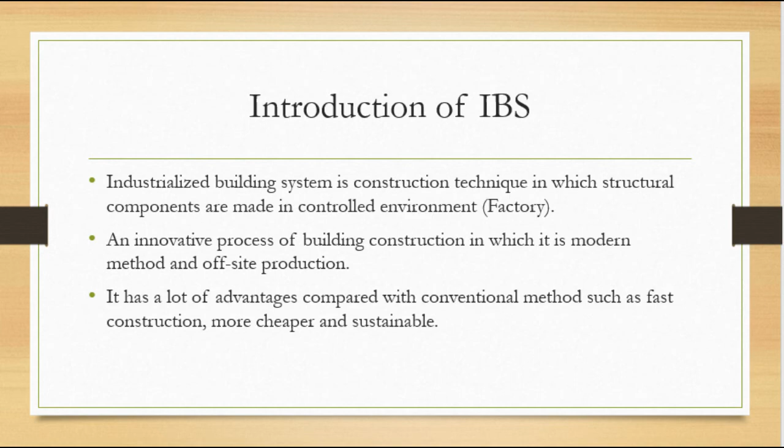Because it doesn't use a lot of timber, so we don't have to cut down trees. Also, it doesn't produce much wastage, unlike the conventional method which produces a lot of wastage.

So this is the background of the project. The name of the project is Heathrow Hotel, made from a light steel framing system. This project is located near Heathrow Airport, London. The client is Shelby Limited and the contractor is Watkin Group, and it costs around 1.9 million pounds.

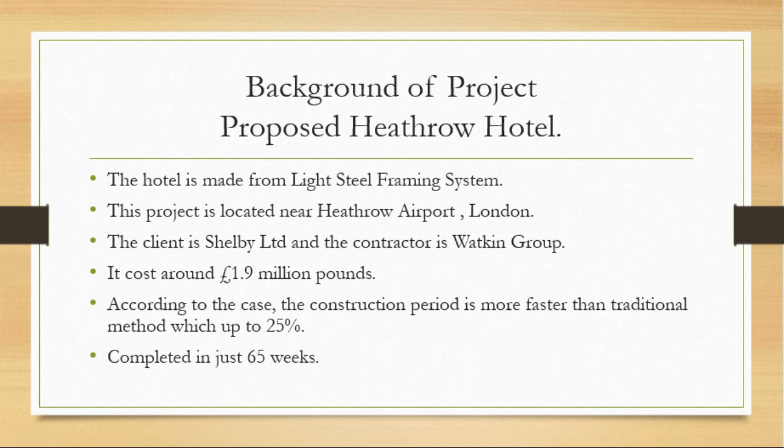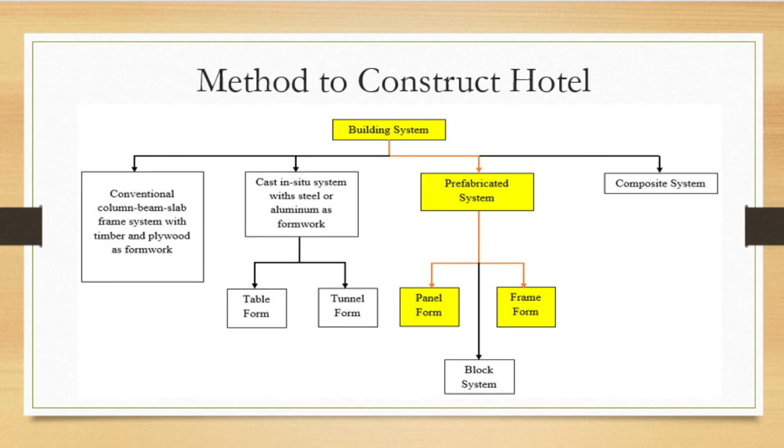There are 4 types of building systems. The system used in this project is the prefabricated system, using panel form and frame form. Here are the details of the project.

They use mixed modular and light steel framing. The Metframe package includes designing, fabricating, supplying, and installing all structural members, costing only 1.9 million pounds. Internal walls are load-bearing steel studs with insulation and dry lining to meet fire resistance and acoustic performance standards. A special feature is an additional layer of insulation to provide extra acoustic buffering against noise from the airport.

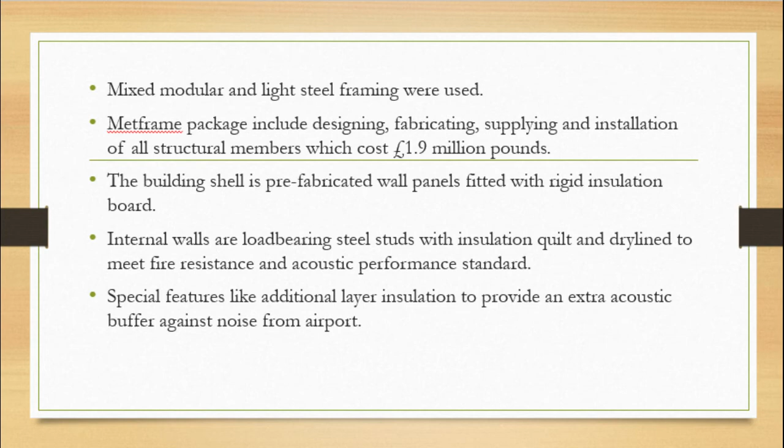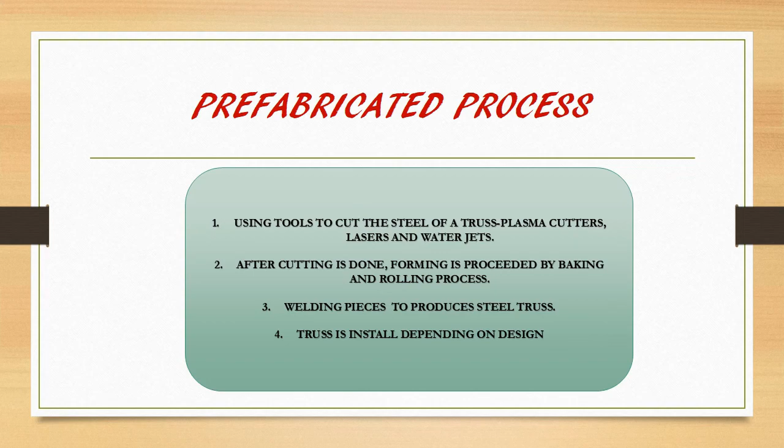This slide shows the manufacturing process of the system: the prefabrication of steel trusses, how the welding process is done by the fabricator, and how the trusses are installed on site.

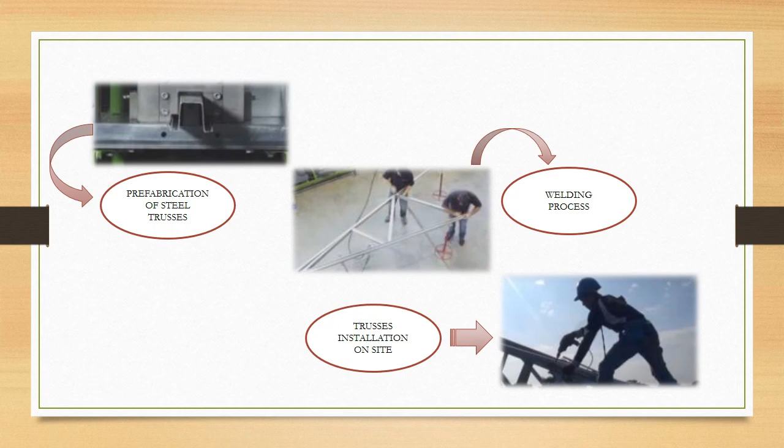There are 3 types of framing systems. First is skeleton steel framing. Second is wall-bearing steel frame, and third is long span framing.

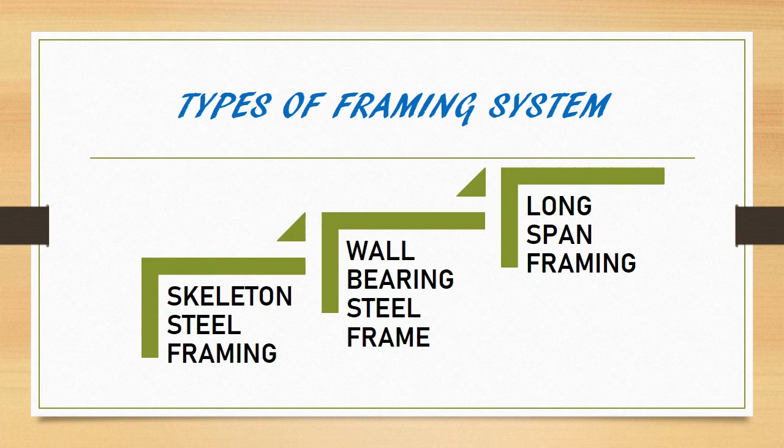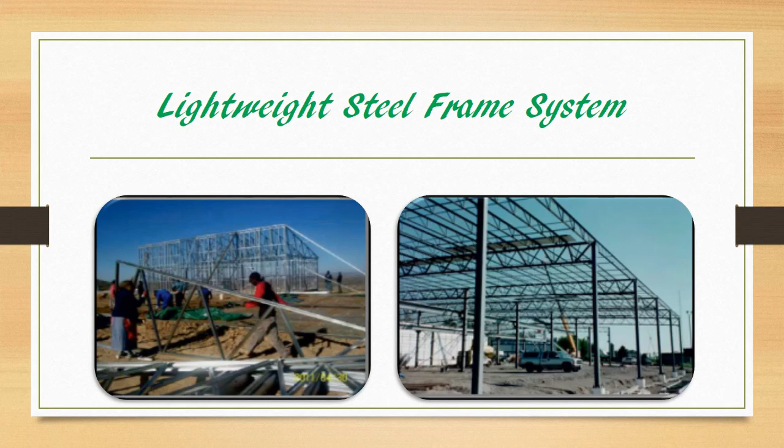The parties involved in this system are the contractor, client, and buyer.

The contractors are the stakeholders dealing with the project management, handling issues relating to construction on a day-to-day basis, including the means and methods used in the execution of the construction of the project, in accordance with the contract documents.

Not only that, they are responsible for supplying material, labor, equipment, engineering vehicles, tools, and services necessary for the construction of the project. In many cases, the main contractors will delegate portions of the contract work to subcontractors.

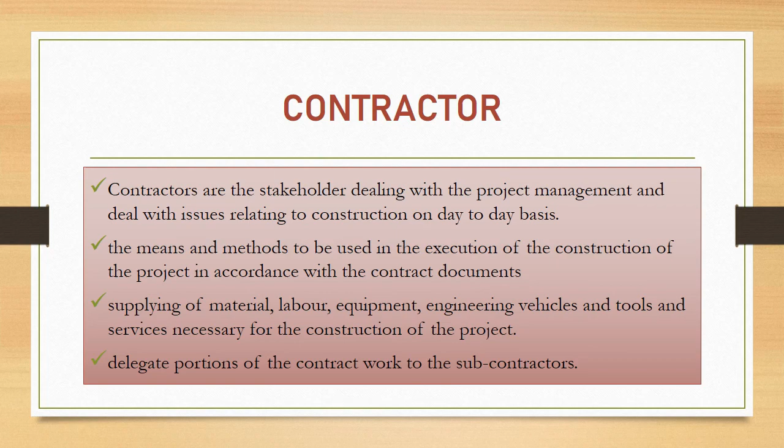Next is the client. A client with good knowledge and awareness of IBS benefits will undoubtedly encourage designers to design a building according to IBS. The adoption of IBS in Malaysia is client-driven. Thus, the client plays a major role in decision-making whether to use IBS or not. In line with that, comprehensive awareness of best practices for the client and decision makers should be held for them to get the correct information on IBS.

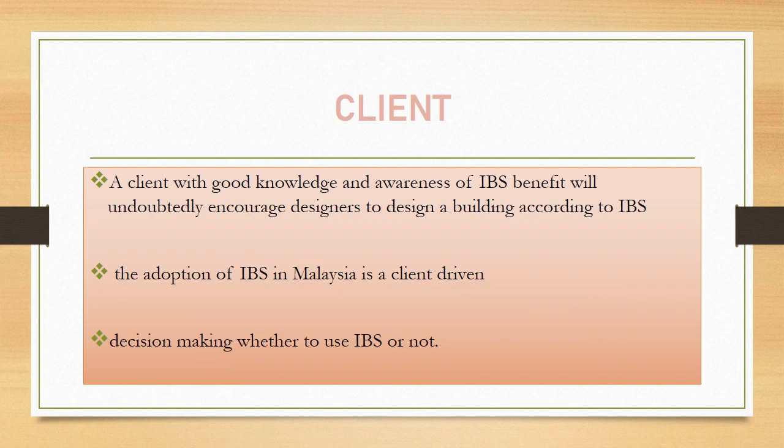Third is the buyers. The buyer is often skeptical with IBS buildings due to durability and quality issues such as leakage and concrete problems, unattractive past designs, and inflexibility of renovation. Thus, to improve the perception of low quality, it is recommended to improve training in installation techniques by addressing interfacing and tolerance issues and avoiding any faults during the installation process.

At the same time, manufacturers must ensure that the components of IBS design pass quality control measures before sending to the site. Regarding inflexibility of renovation, the buyer should be explained about the availability of a hybrid system that caters for them who often renovate but at the same time keep the structure intact. Therefore, this system offers less wastage and provides speed to the contractor at no extra cost, extra headroom, a consistent finish, and flexibility for renovation.

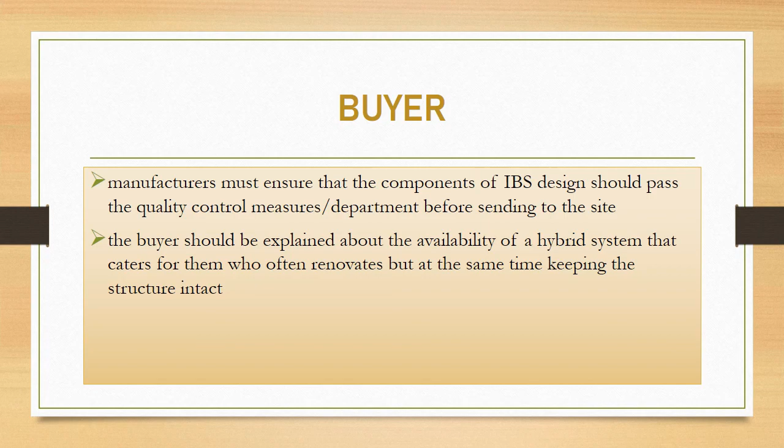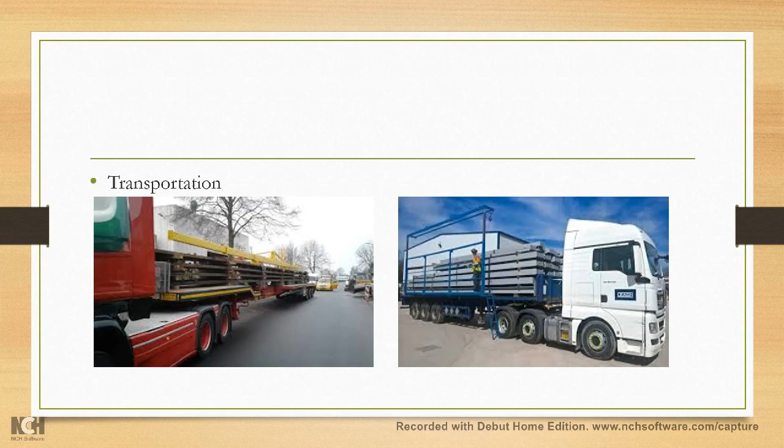Okay, that's all for the transportation part. So let's move on to the next part, which is fabrication of light steel framing system. Let's go, so now this is for the fabrication.

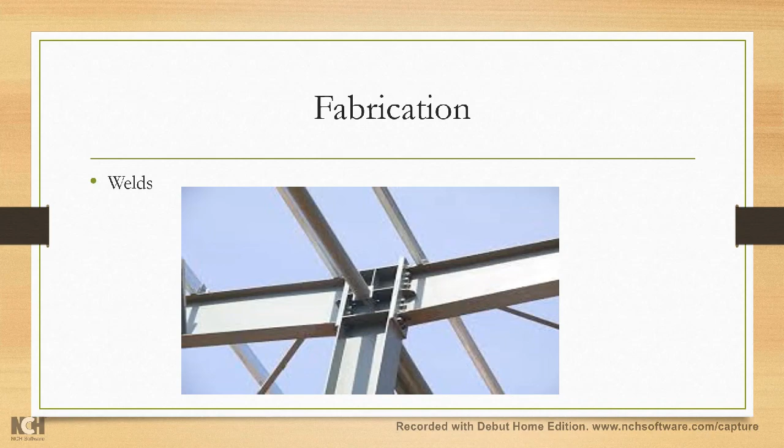First of all is the welds part. This is an example of the welds part of a steel light steel frame structure.

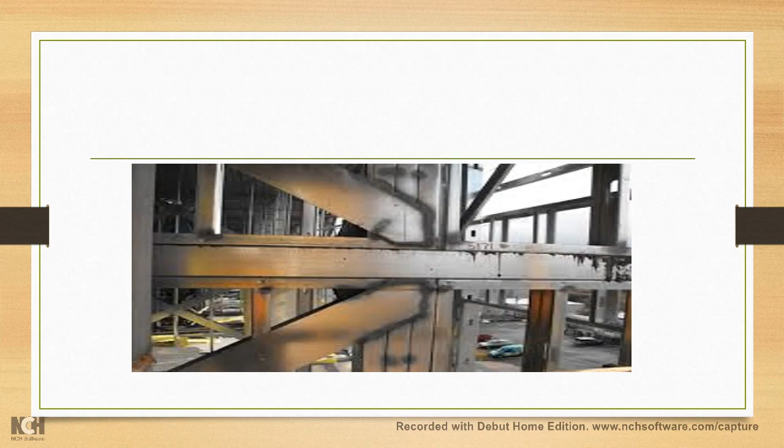The next one is bolts and nuts. The light steel frame is joined with bolt and nut to tie it together. This is an example of a bolt.

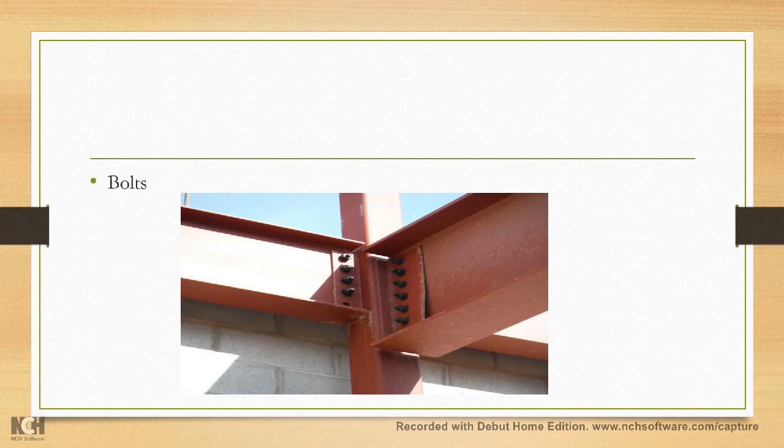The next one, we will see about screw connection. The screw connection is really suitable for the smaller components of light steel frame. This is an example of the procedure to drill and make the screw on the light steel frame. That's all for fabrication.

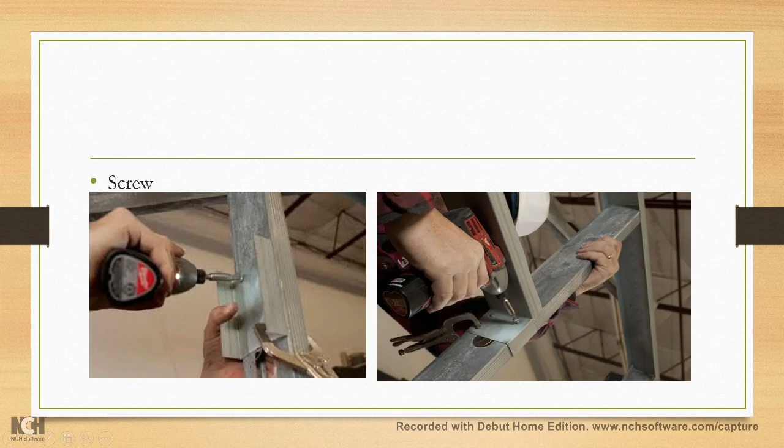Now we come to the discussion of our study. We all agree that the usage of IBS brings more pros than the conventional construction method. As proven in our IBS project chosen, it can be easily said that IBS reduces the time taken for completion of a project due to advanced off-site preparations and more simplified installation process. Furthermore, the construction schedule is far more manageable by the use of planning control, estimated lead time, and forecasted downtime. As for safety, it is proven to promote a safe and systematic factory working environment.

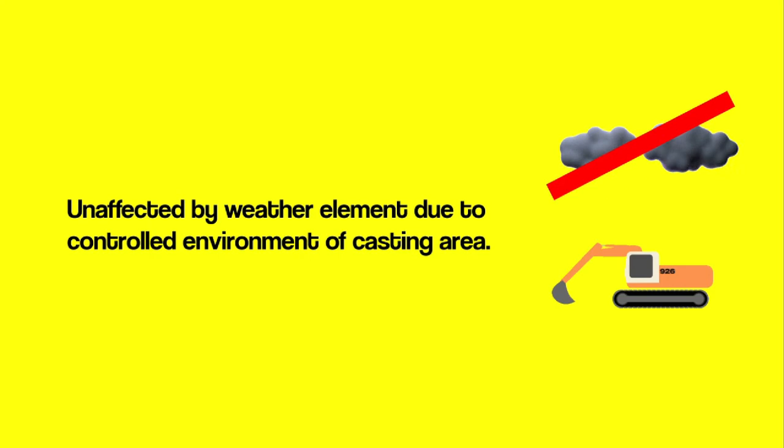IBS also reduces dependency on foreign workers and reduces money outflow and their social problems, low quality works, delays, and diseases. IBS is also proven to reduce costs of transferring waste material due to quality control, and also reduces on-site workers, significantly reducing labor costs for contractors. Also, IBS is unaffected by weather elements due to the controlled environment of the casting area.

In conclusion, we can conclude that IBS has proven to be a more economical approach in the construction industry and should be implemented on a large scale. IBS as the main method of construction must be high on the list for discussion regarding the sustainability of the world, focusing on the construction industry. Knowledge about this new era of construction method must be widened and enhanced. There are many successful projects implemented using IBS, for example the Heathrow Hotel, which proved more advantageous than normal types of construction. With that, thank you.